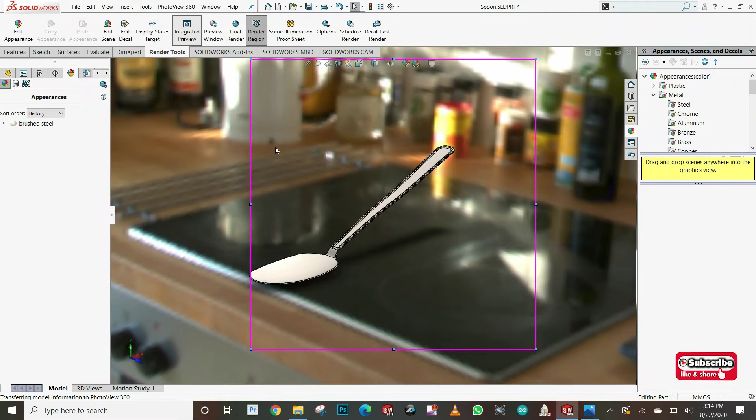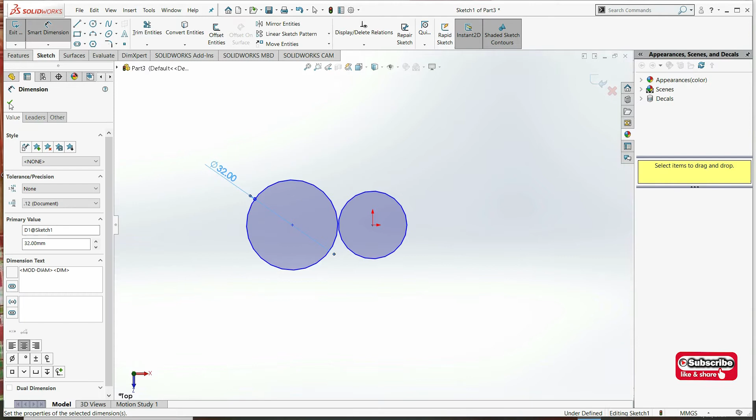First I'm gonna create my part and create a sketch in the top plane. We're gonna draw two circles and add the relation now: these two centers are gonna be aligned, and I made the horizontal constraint. One diameter is going to be 32 millimeters and the other diameter is going to be 37 mil.

I'm gonna add the relation of these two circles. They're gonna be tangent, and now I'm going to proceed to draw a line. This line is just gonna be a reference that I'm gonna use. You're gonna see how I'm gonna use it as a reference to draw the outline of the spoon.

I'm gonna draw this reference line at a 20 degree angle, and click again on arc to make this arc. As you can see, I point the end of this arc at the 20 degree angle reference line, and I'm gonna make this arc again tangent to both circles. So this is going to be the shape of my spoon.

Right now what I'm going to do is draw a center line, which I'm going to use as a mirror, so I don't have to draw the arc again and make it tangent. We can make our life easier.

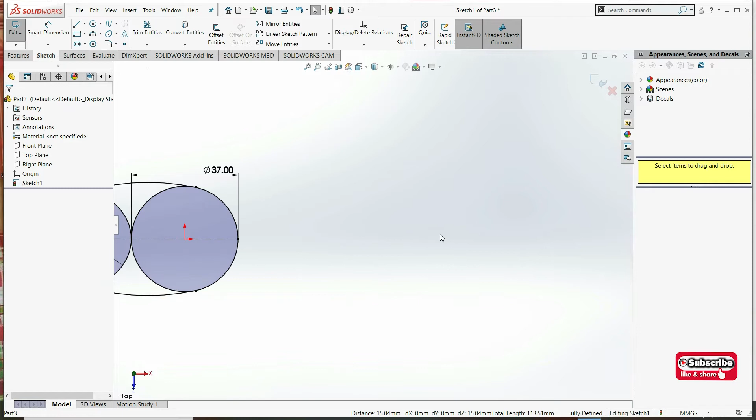Now we will proceed to draw the handle, this is the part where people grab the spoon. The length of the handle is going to be 120 mil, and it has a slight angle, a little wider at the end, a little skin.

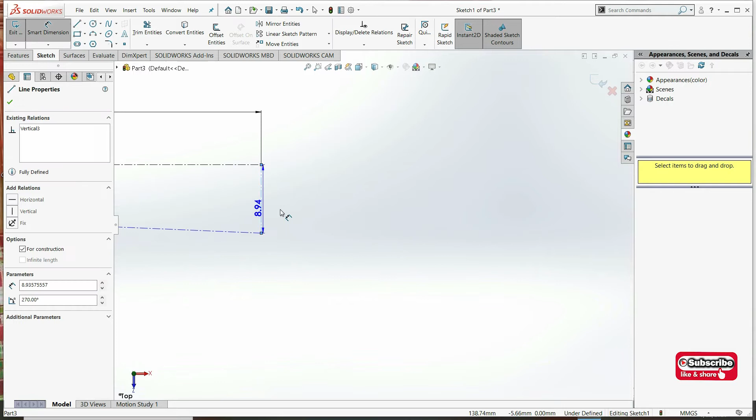Closest to the actual curvature of the spoon. So this width is 15.5. I'm dividing it in two because I'm going to proceed to mirror this shape, so I'm just gonna draw half of the shape.

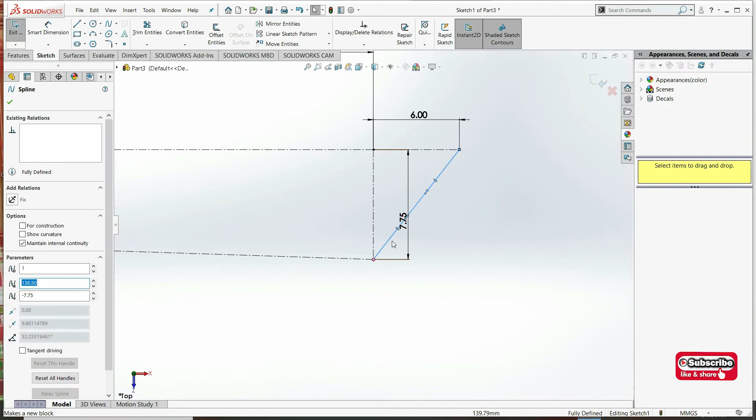I'm gonna draw here a reference line of 6 millimeters. This is gonna be a reference for my spline because I don't want the end of the spoon to be just a square. I'm gonna make it a little fancy, draw a little curvature.

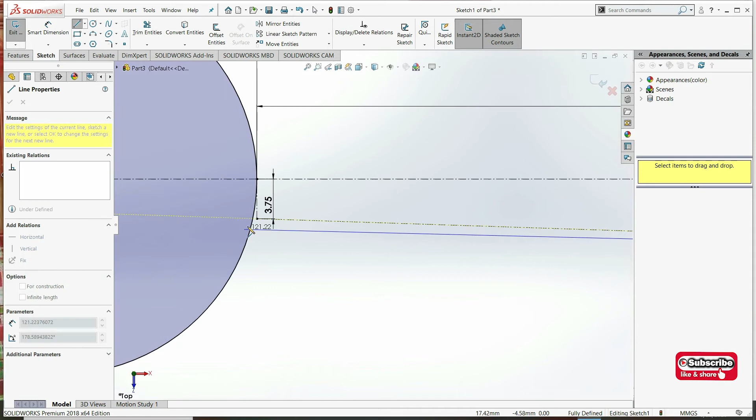I'm making this spline tangent to this line, and I make this reference point on the spline just vertical. So I'm gonna add the relation, make it vertical, and I just need this side. I'm gonna draw a straight line until the actual spoon.

I want to draw a little arc here, so it fills in and makes the spoon a little more realistic. I'm gonna make the relation tangent between this little arc and the handle and the actual spoon, and add a radius of 5.

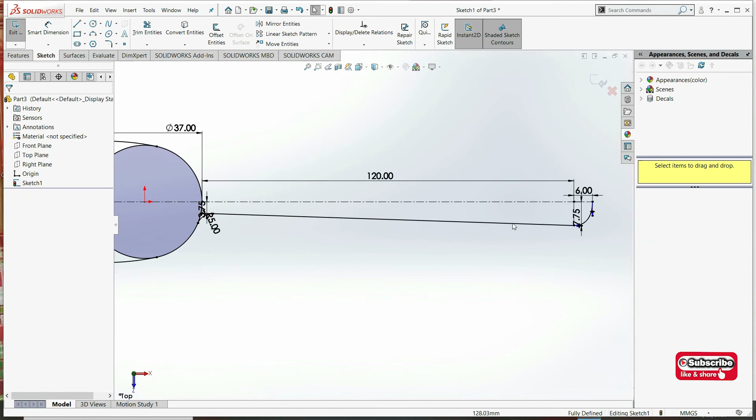Now I'm gonna proceed to use the tool for mirror. I'm gonna choose this, the arc, the end, and the spline, mirror with respect to this line, and that's it. Done. So I have pretty much my shape of the spoon.

I'm gonna exit the sketch. Oh, I forgot to add something.

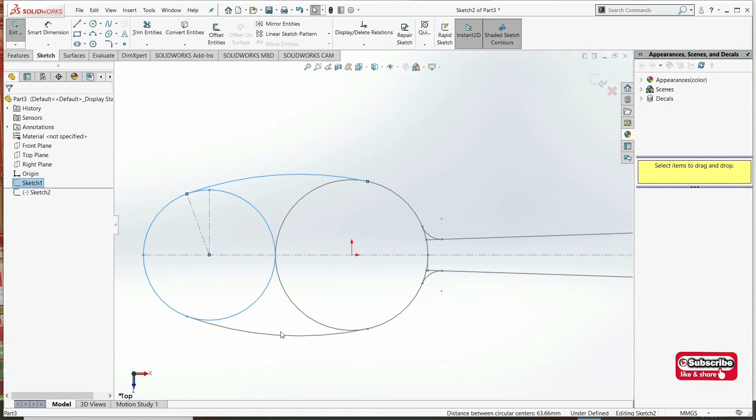I'm going to draw this sketch again. I'm gonna draw a center line because I'm pretty sure I'm gonna need reference lines in the middle of the spoon. So let me draw a center line here.

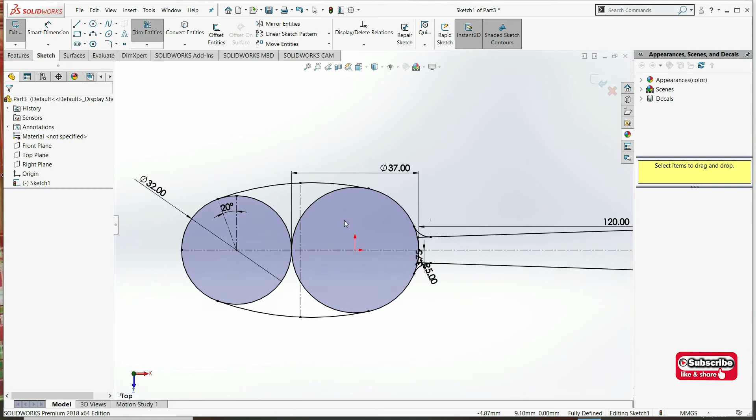I'm gonna select the midpoint of this line and make it coincident. That gives me an error here. I grab another reference point, I need this, make it coincident, this center point to this line. I'm gonna cut here, and exit the sketch.

Alright, so pretty much my top profile is already done. Now I will proceed to draw a sketch. If you put the spoon on the side, this is what I want, like a side view of the spoon that will work as a reference for what exact shape I want.

Actually, all these dimensions I grabbed physically from a real spoon in my kitchen.

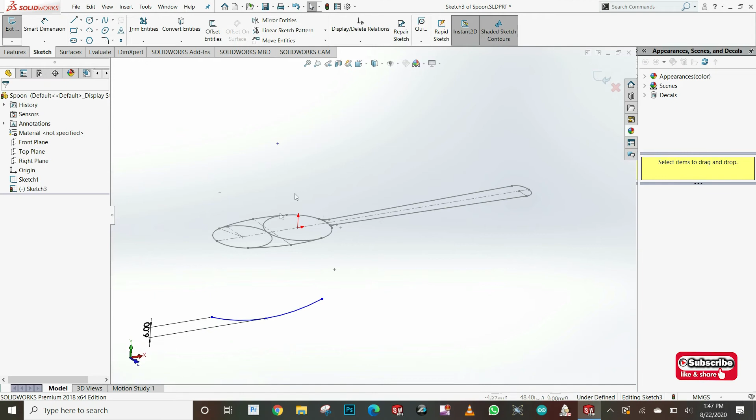Right now I'm drawing the curvature of the spoon, and I'm going to make these corners have the relation that they're vertical to the end of the spoon.

I'm gonna choose just dimension, this is just to have it fixed so it's not traveling around this curvature. I always like to constrain all the shape; it's something I recommend when you work in SolidWorks.

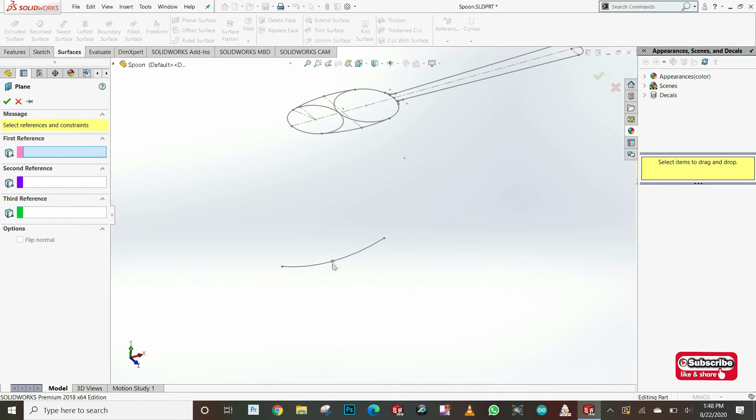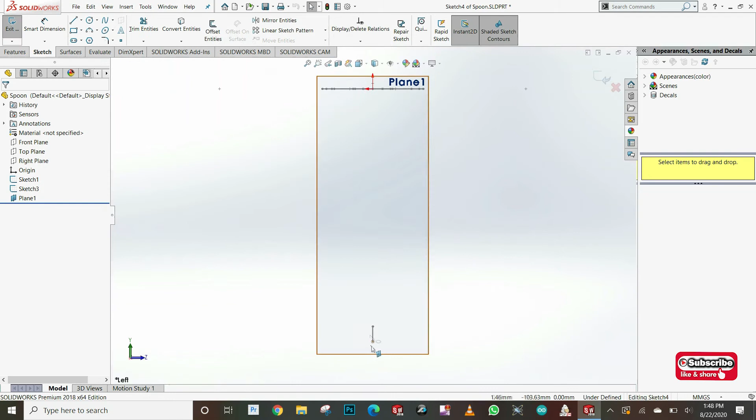Right now I'm just gonna draw in the plane pretty much perpendicular to this, and draw the curvature if you're looking at the spoon from the front view. With these two curvatures, let me spin the view a little so you can see more clearly. This is the curvature looking from the front view, and with these two curvatures we'll be able to build the curvature of the spoon.

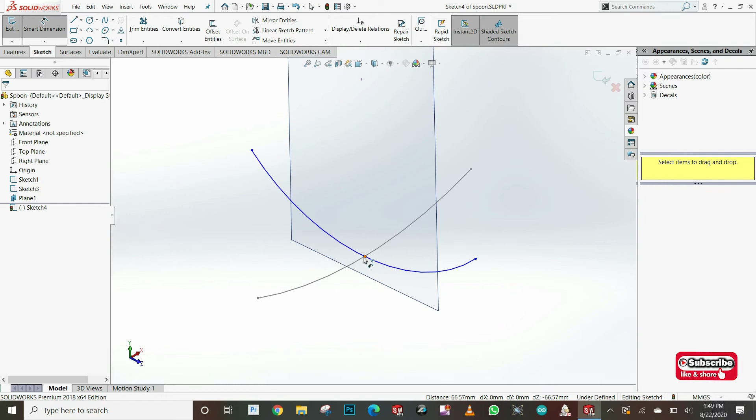I'm gonna do the same, constrain this point, making it horizontal, making sure they are aligned. Making the depth of the spoon 6 millimeters, and from here to here I'm gonna say that is 40 mil, as long as you are longer than the top sketch - this is what I'm comparing. Just to be safe, probably I will put 50.

Well, I think 40 is fine, it's long enough compared to this actual line. This is 39.5, so 40 will be fine. I will put 42 just to be safe. I think that's enough - I'm exiting my sketch right now.

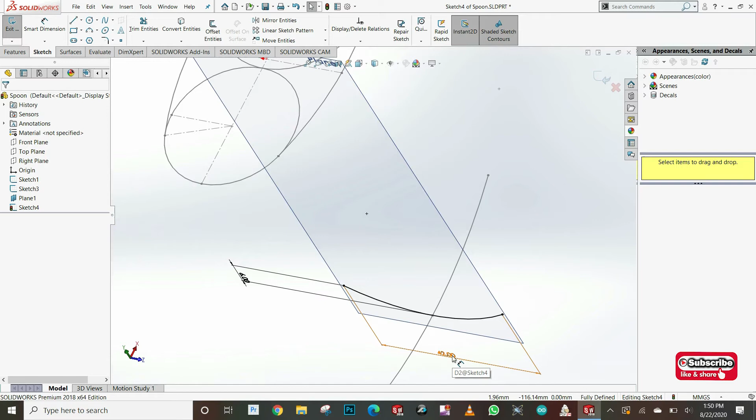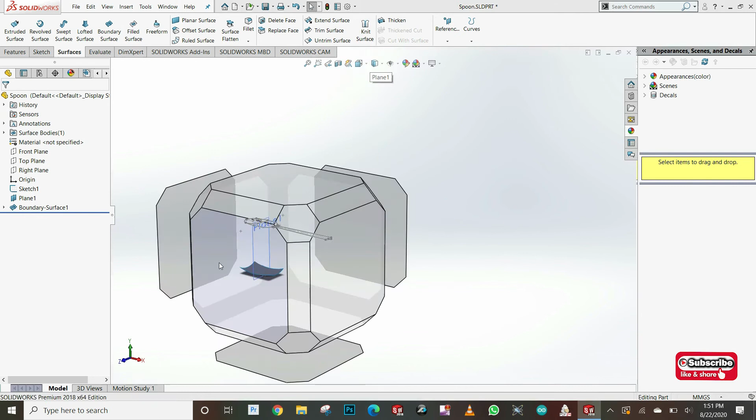I don't know, maybe 40. Yeah, 42 is fine. So exiting my sketch, I'm going to work with surface and click on boundary surface. I click on the first sketch, click on direction 2, and click on the other curvature, and you will have something like this. Now we'll proceed to start building the handle.

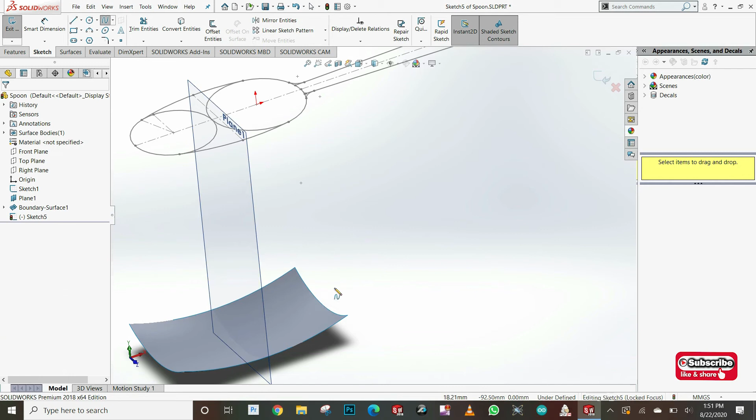So I'm gonna continue drawing the actual shape, the side view of the spoon. I'm gonna draw a little curvature here - I would say it's better with a spline, and this spline, like I say, it's gonna depend. These are the closest dimensions I could get from my physical spoon. It's really hard to measure.

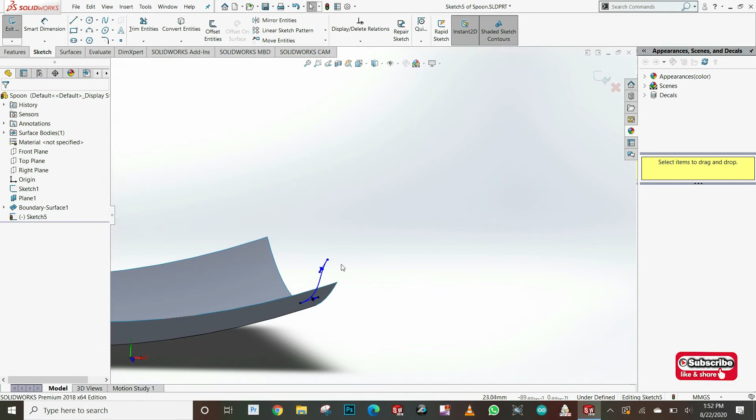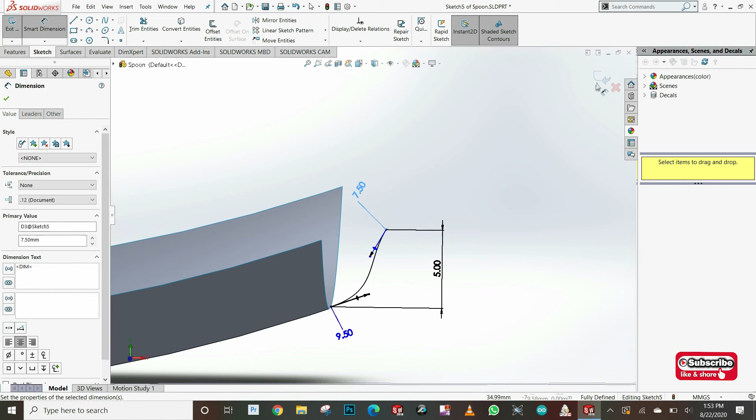I will put coincident that is vertical, so you always want to align the side sketch with the top sketch, so in this way it's always aligned with the top sketch, and I want the height here 5 mil. These are just dimensions, whatever is closest to my physical spoon. This will depend on your spoon if you want to model at home, but you're gonna have pretty much a general idea how to draw a spoon.

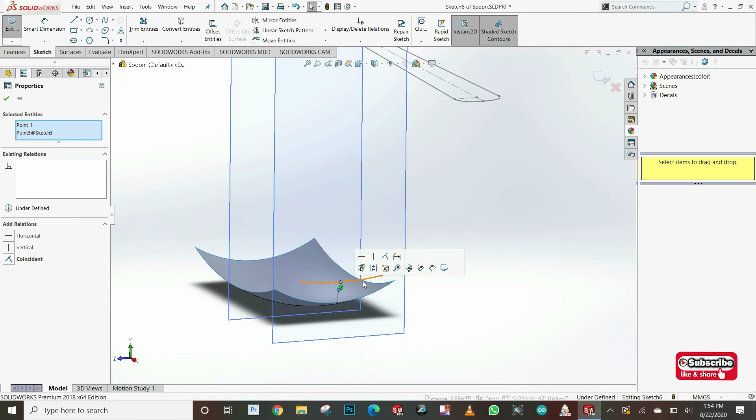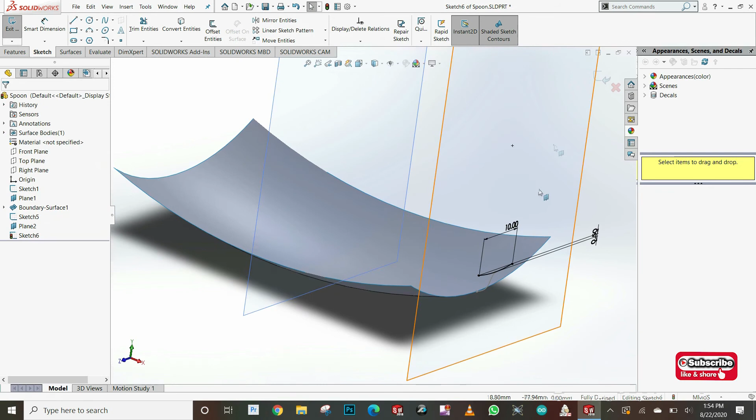So here what I'm gonna do, after I draw the side sketch, I'm gonna do the same process for the first curvature - I'm gonna draw the profile. If you do a cross section, what will be your profile? Here the curvature is not so aggressive as the initial curvature, it's just 0.5 depth, and I think with these two sketches I can pretty much build the next section of the spoon.

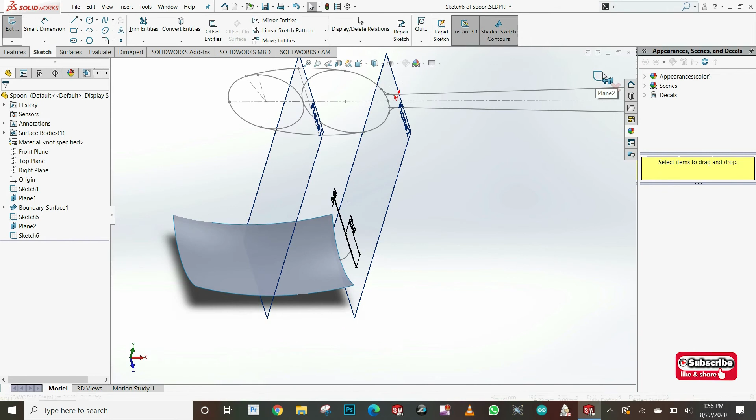I'm measuring here, this is 7.73 mil, and always, like I said, try to make sure this is longer than your top profile. It's just a recommendation. You're gonna see later while I'm doing this.

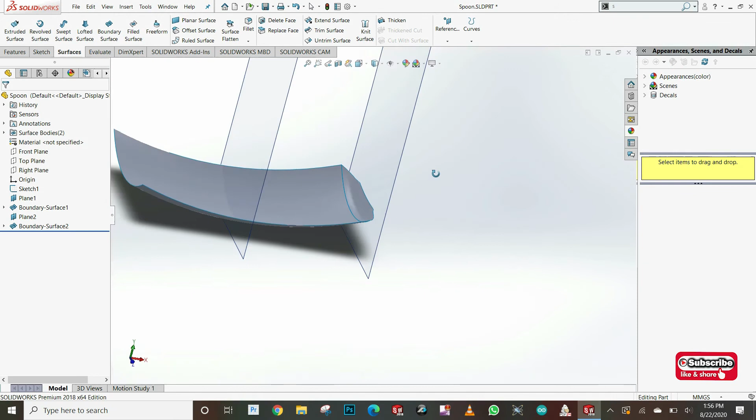So here on direction 1, selecting the first profile, which is the actual initial solid surface, and the second profile is gonna be the arc that we just drew, and on direction 2 is gonna be the side profile - that's gonna constrain the actual curvature. Here I'm just making the other section of the spoon, and like I said, I'm gonna constrain this to this end, make sure it's coincident with this surface.

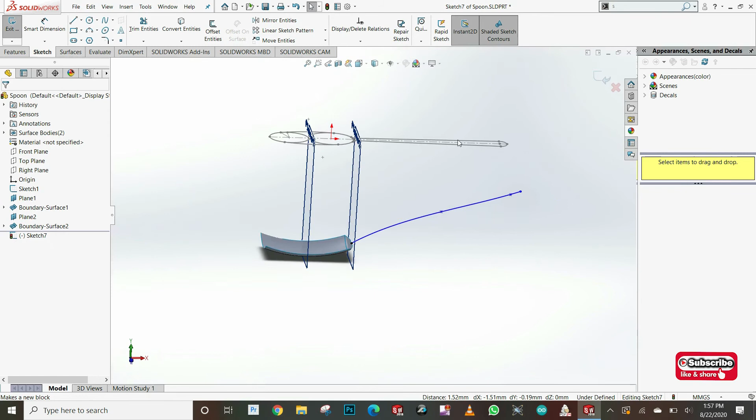I'm just making vertical all this. Like I said, try always to make a relation between the side view and the top view. And here I just draw this line as a reference, just trying to make it approximate my shape.

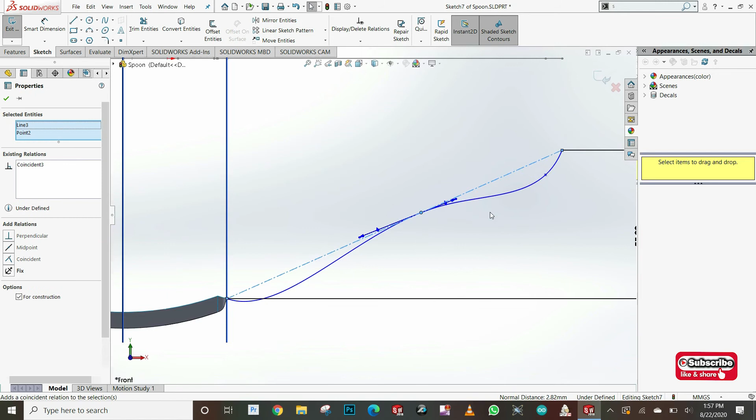I was noticing the shape of my spoon is not completely straight, so I want to make it as realistic as I want. I'm making this coincident and you can see there is a little curvature - the spoon starts a little up and then goes a little down.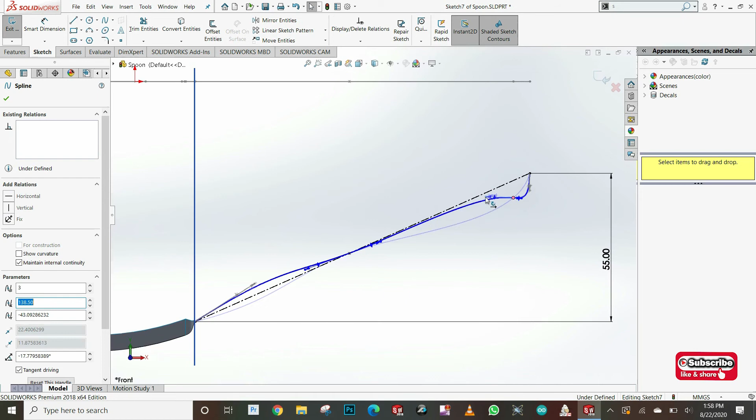So here you can play - if you draw a spline line, you're gonna have these curvature controllers, and you can get the shape exactly as you want. Like I said, you don't have to do exactly as I'm doing it, just get a general idea how to draw the spoon as closely as you want - it depends on your project.

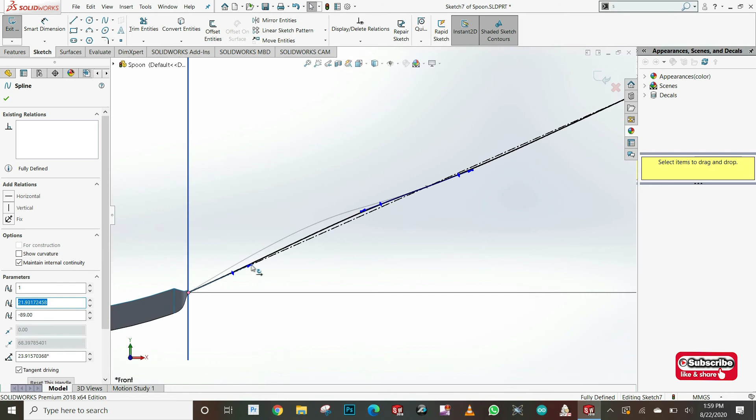The purpose of this video is just to get the general idea. Now, if you want more information, please don't hesitate to leave some comments, and I will be more than happy to help you.

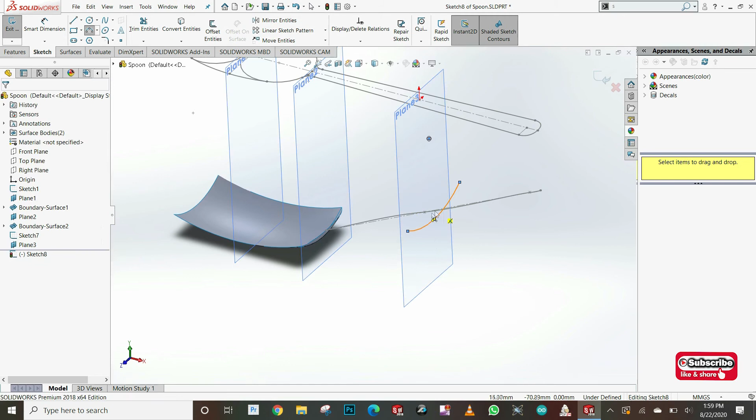So here I'm doing the same - I create a plane at this point, and I'm gonna draw the cross section at this point. Here is pretty much the same, depth of the curvature is 0.5 mil, and I'm just making it 20. Just make sure that it's longer than the top profile.

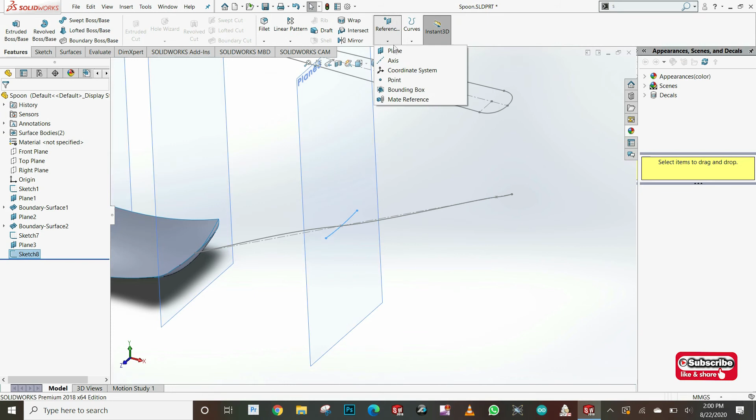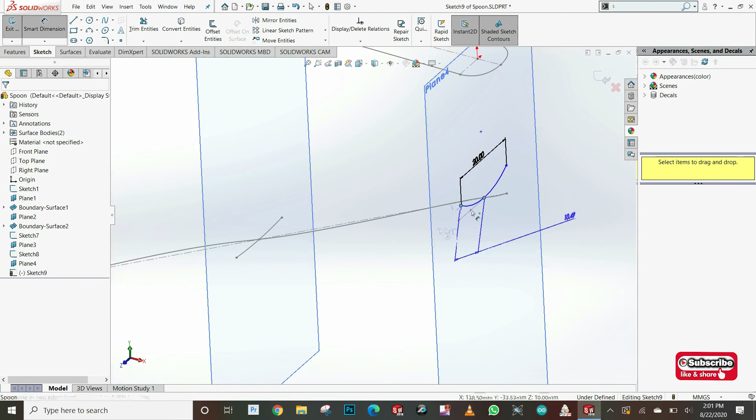I will be more than ready to build the next section. I'm just gonna build a whole surface from the last surface to the end, so I'm just making one different cross section along all the handle. I'm making constraint - this is horizontal, just to make sure that the cross section is not crooked or at an angle.

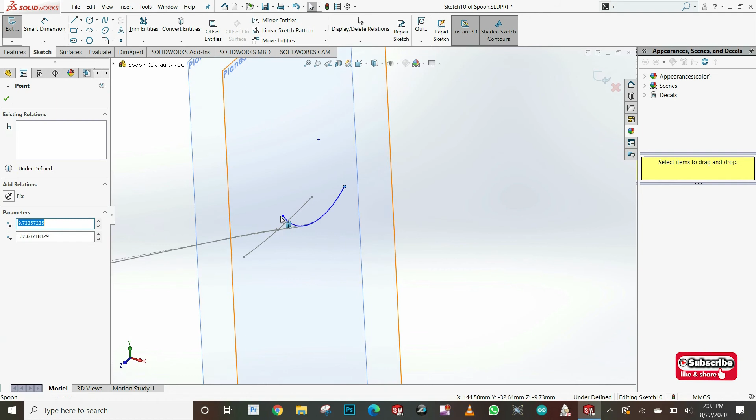I'm creating here another plane and making the same cross section. Here I'm making coincident the center of the arc - make sure the center of the arc is coincident with the side curvature.

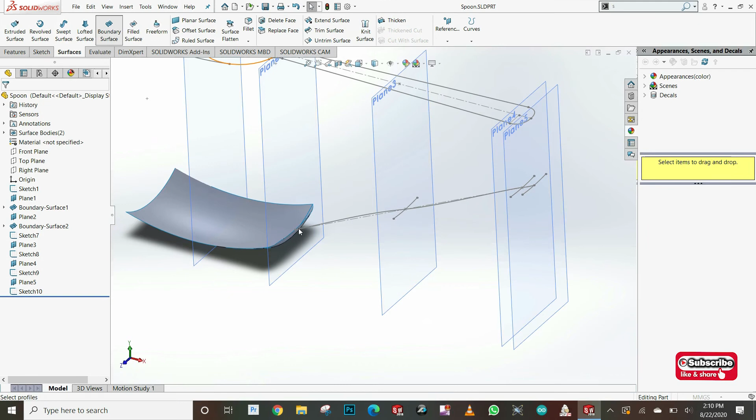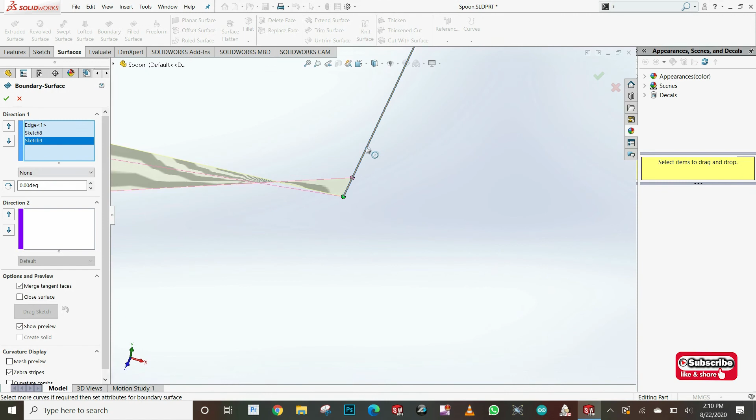Here I have all my sections already built, and I click on boundary surface. I'm gonna click on all the different profiles that I have. Here it's not doing it the right way, so sometimes what I do is drag the point, and sometimes make a line, but sometimes you really struggle to make it work, so I'm just gonna try again.

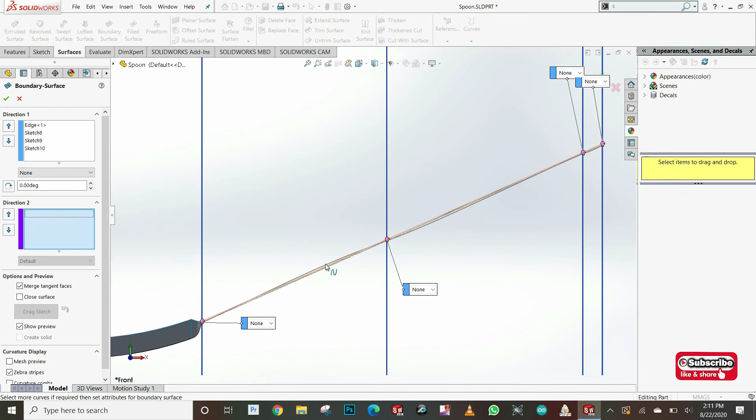It's doing perfectly now, so this is okay. This is what I want, and I'm going to make the little curvature. This is straight, this is not what you want, so we're gonna select this, and now as you can see, it built just a surface with the curvature that I want.

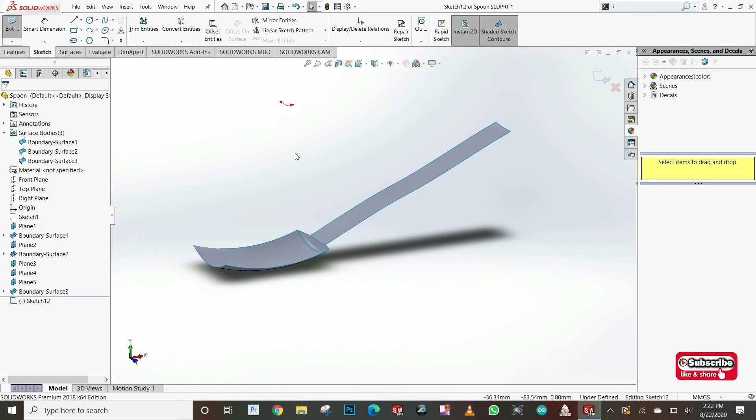Now we're pretty much done with this, with the spoon. We just want to cut it and make the shape of the spoon. So I'm gonna use the top plane, but because I have two reference lines, I'm gonna create another plane of the section view.

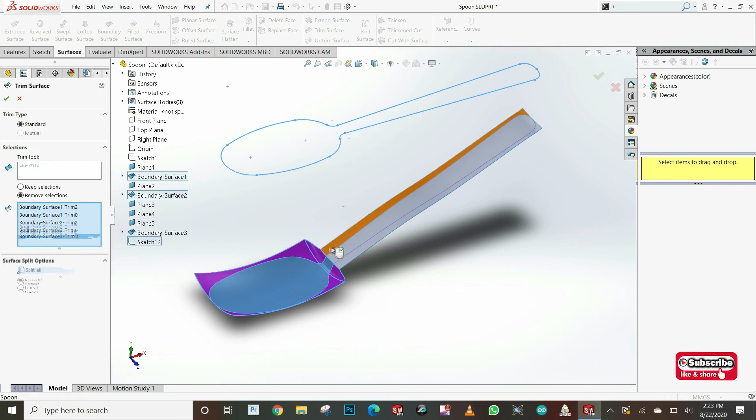So I just convert the entities and cut what I don't need. So I have already my sketch ready to use as a tool. I'm gonna click here on trim surface, and use the trim tool, and make sure you have the option remove selection, and you choose what you want to remove, and this is the final result.

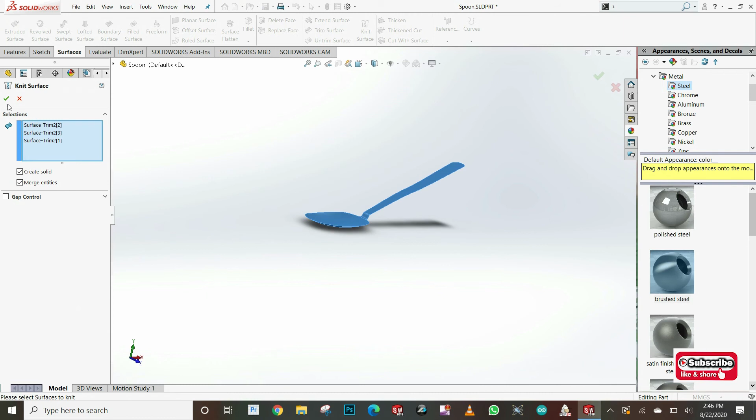I'm gonna save my document just in case my Solidworks sometimes crashes, and I'm gonna knit the surface, and make sure you select create a solid and click on thickness, and I'm gonna put a thickness of 0.75 millimeters, and this is how it looks.

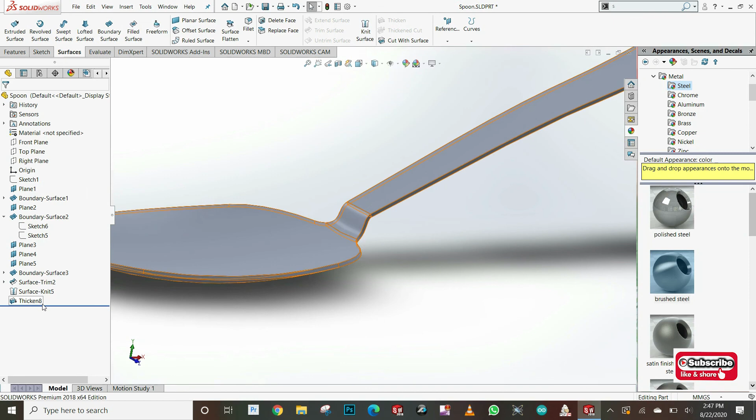It looks very good. I'm gonna try to make some fillets to make it more realistic. It's not doing it, and I think I'm facing a problem in this area. So what I'm gonna do is delete this area. I can see that probably it's not doing correctly because the spline is not proper.

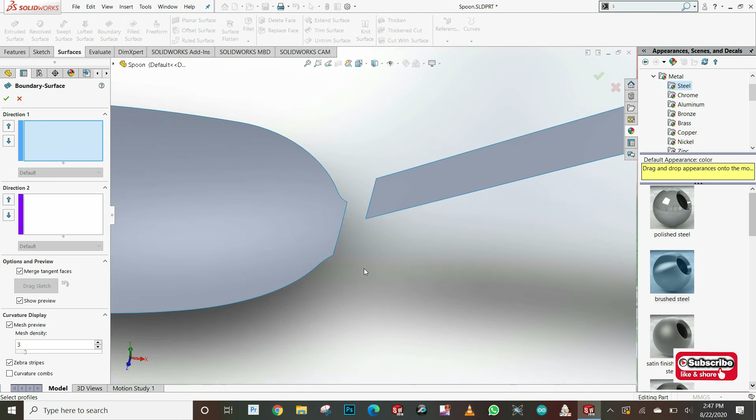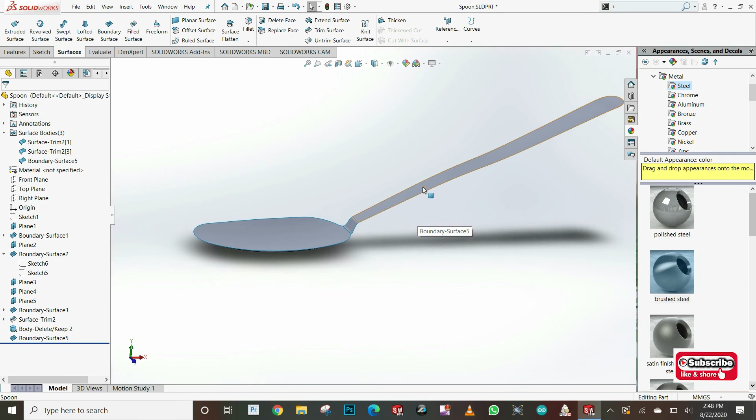I think the best way is to use the boundary tool again, choose these two, and I want this ending in a tangent. So I click here tangent, as you can see, make the curvature, and here I will choose the edge 2 on that one, tangent to the face. So as you can see, I have the same finish, and this should be a more solid tool to apply other features.

I just knit the surface again. Make sure you click solid. I'm gonna apply a thickness of 0.75 millimeters, and now I will proceed to add the fillets. Let's see this time if it does it.

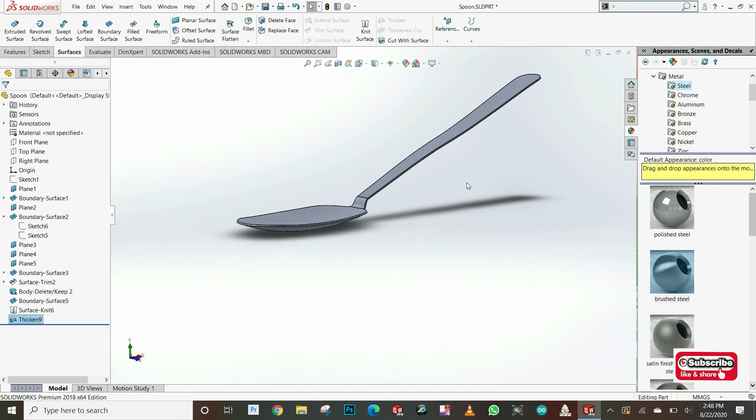It looks pretty good, and yeah, this time it's doing correctly. I apply a fillet of 0.1. As I said, this will depend on you. Apply a fillet all the way in the profile of the spoon. I apply here a material just to make it look fancy.

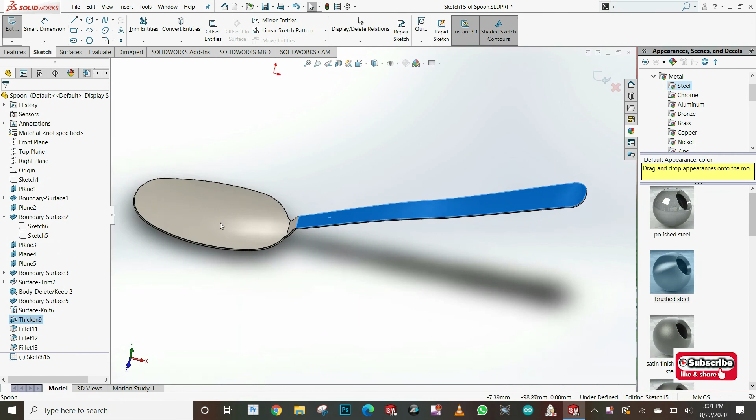Right now I'm gonna make a little decoration on the top. So I'm gonna make a top plane. Use the old sketch as a reference, so you can use the same profile of your spoon, and use the tool offset entities.

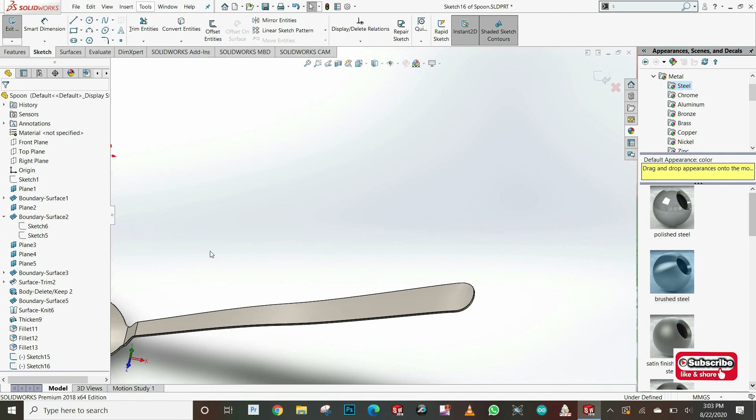So after I have my profiles of the sketch, it will work. Let me put visibility on my sketch. I'm gonna go and choose this one.

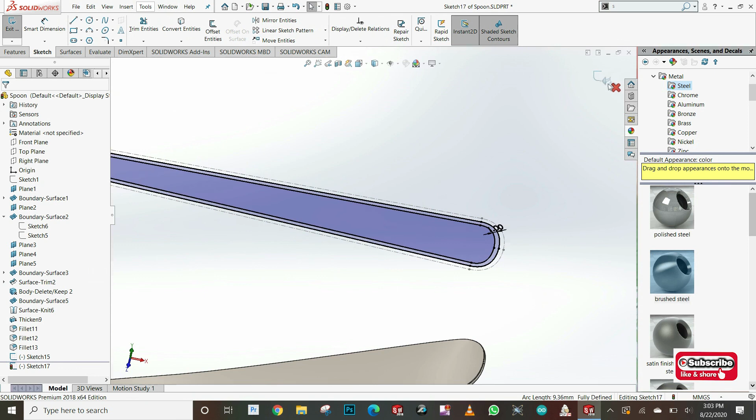Click on convert entities, and this time I'm gonna do again the offset, because if I do it in one sketch, it doesn't allow me to do the double offset option. So right now, as you can see, I have a profile which I'm gonna use to do a cutout on the spoon, and it's gonna give a little more life to this spoon.

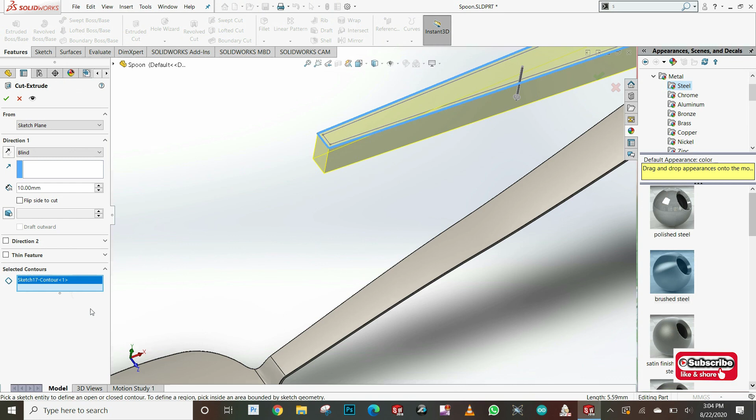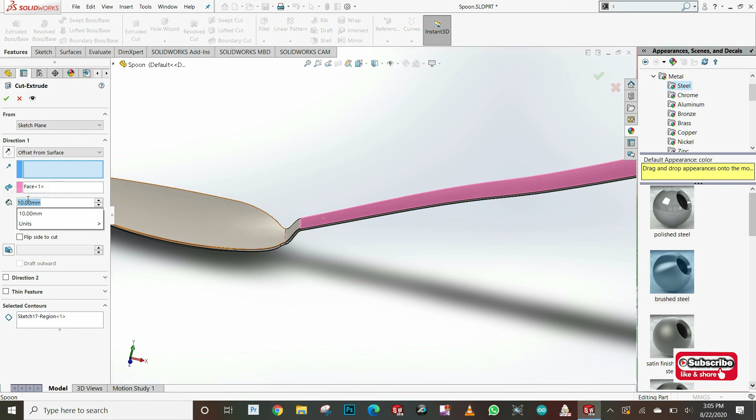So I'm gonna click on the option cut extrude, and choose the contour, which is going to be this one. I'm gonna choose the option offset from surface, and select the surface. Probably I'm gonna do a cutout of 0.25 mm or something like that, and here you want to choose 0.25. So as you can see, that's the distance from the surface, but that's not what I want.

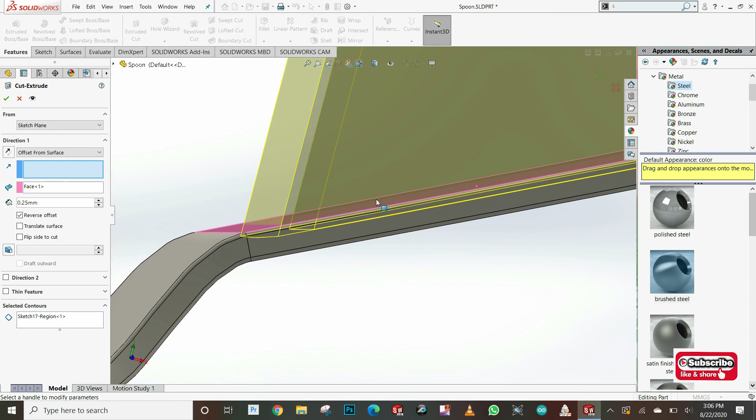I want to cut out from the actual surface and go down 0.25 mm. It's not one of these options. It will be this one, reverse offset. As you can see, it's cutting out 0.25 mm from the surface, and we just right now click OK.

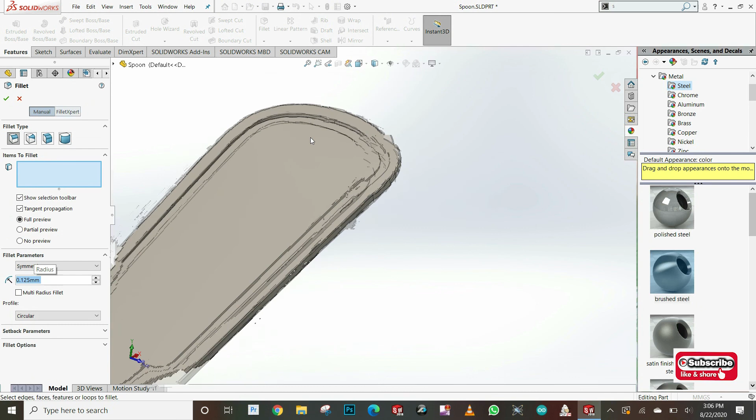I will apply some fillets just to make it more realistic based on my spoon. Probably 0.125, I think is more than enough. It's looking pretty good, and make sure you select all the edges, and this is pretty much my spoon.

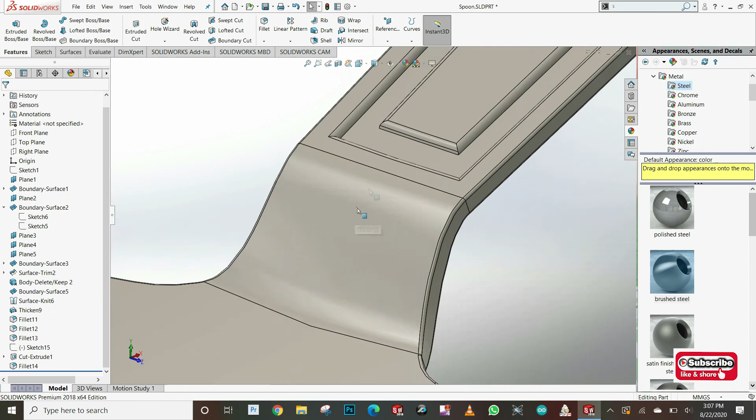Well, I hope you like this video. This kind of looks like a render, and this is the side view, isometric view. As you can see, it's very good.